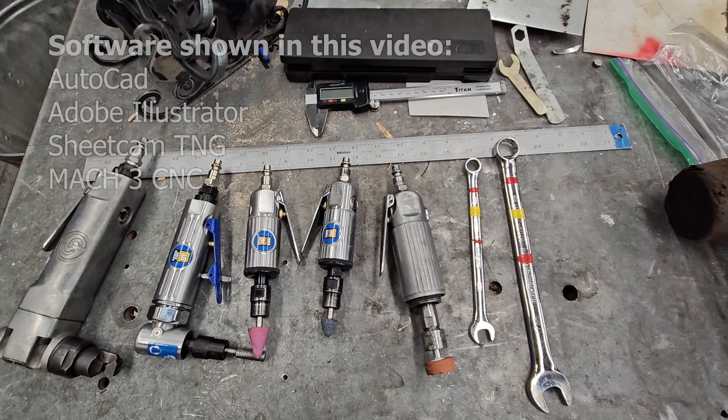So I currently have a big empty space in one of my tool boards, and I have some air tools that have just been sitting in a bin and I want hanging. So I'm going to design something for that.

In AutoCAD I started making some ideas and kind of figuring out my spacing. This is going to be able to hold those little 1/4 inch adapters until I eventually got to, I think it was that one, or was it this one? It was one of those.

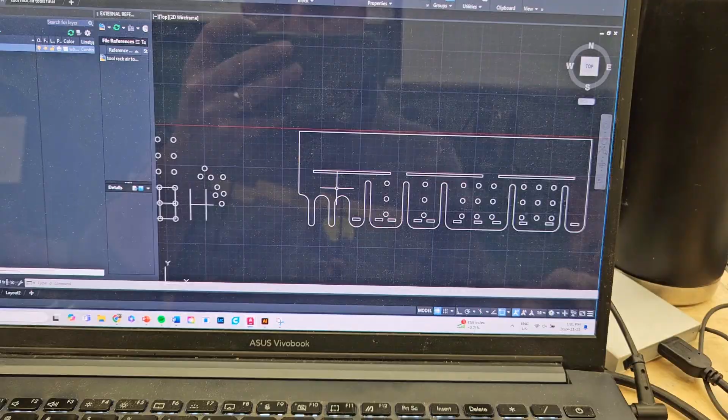I then imported that DXF file into Illustrator because I like to add text in Illustrator, just easier for me to work with. Added a little wrench symbol because that's where the wrenches are going to go. Fixed up a few things. There's a couple nodes that were floating in space. There's a couple broken lines, but now it's time to plasma cut.

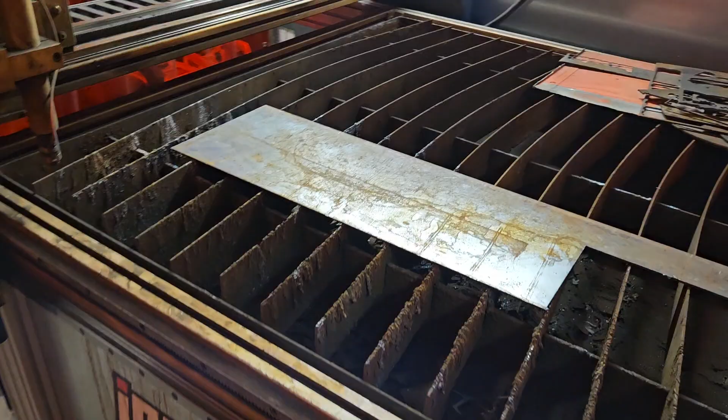Got a nice piece of metal here. So I've got my drawing here. I'm going to go operation. I'm using SheetCam TNG, by the way. I'm going to go plasma cut. I've already chosen my cut layer, and the tool that I'm going to be using is tool number T11. That's what mine's called, but it's for 10 gauge or 1/8 of an inch, 45 amp fine cut, which is what's on my machine, and 84 volts.

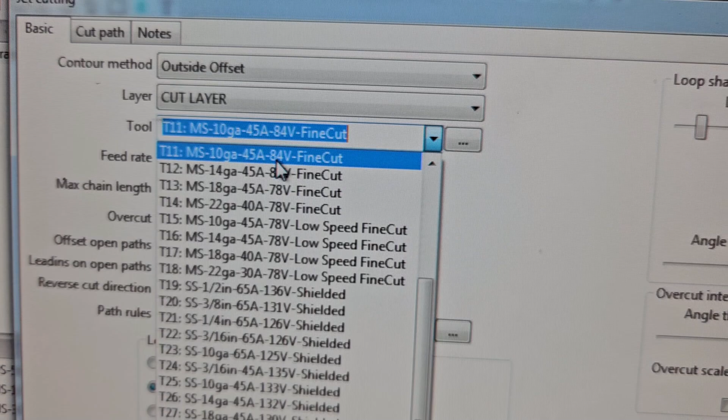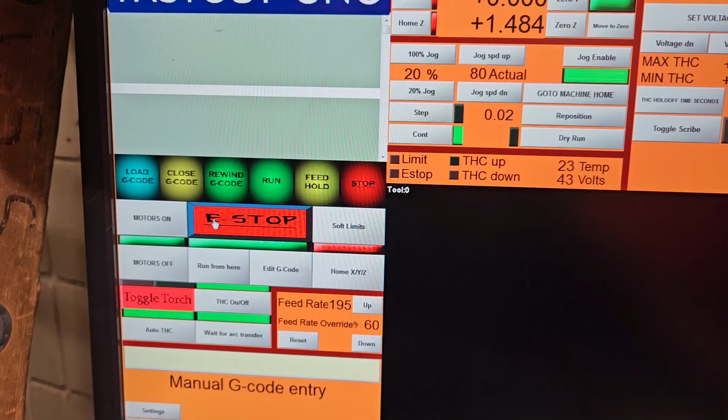Okay, cool. Now that gives me some default settings, and there's no error messages. Yay, I'm happy. So I could take that now and export it by pressing P, convert it into G code, save, does the thing. And then once I get to the FastCut CNC's Mach 3 licensed whatever, I can go File, load the code, find my recent code, and there it is.

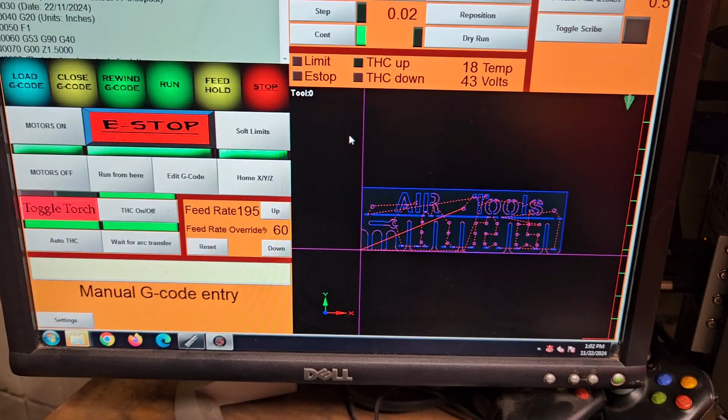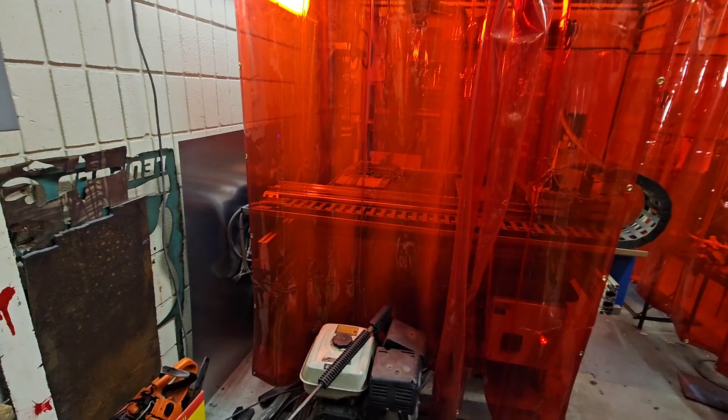Okay, let's set up our metal and the thing. I've already got my motors on, so I can go drive around. Here, let's zoom out a little bit. Hear that noise? It's doing stuff. Now, I usually just kind of crouch here. I don't have the wireless system set up for moving it around, and I'm going to eyeball it to get it close to where I want. And then I'll walk over.

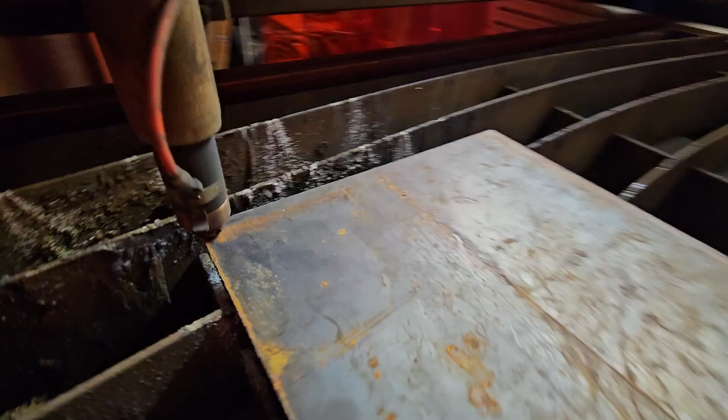Not bad for my depth perception. I'm only off by a little bit. Let's go tidy that up. I'm happy with that. That's going to work for me. Then I can go back over here. It's easier to do with a partner who's giving you directions. I'm going to zero out by pressing zero all, and now the machine believes it's in the right place.

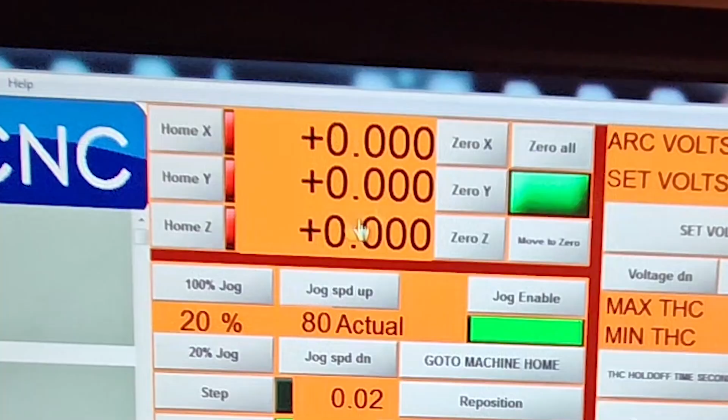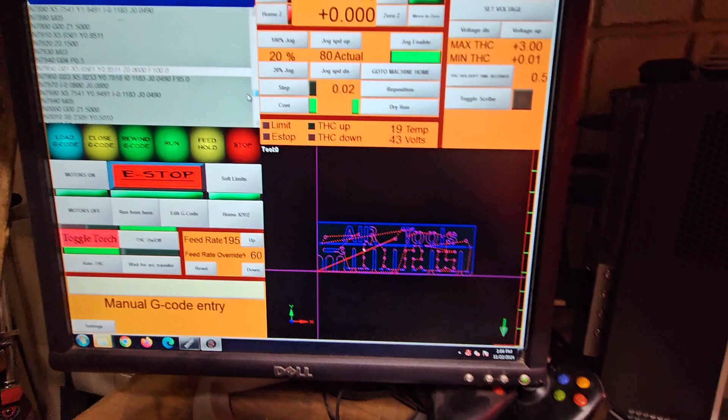Now I could do a dry run. I am going to do a dry run, but only of the final outer shape. So I'm going to scroll down through the code, until eventually I see white lines on the outside shape. So let's see, probably about, ooh, that's a big white line that's going there. We're going to press run from here. There we go. Press run.

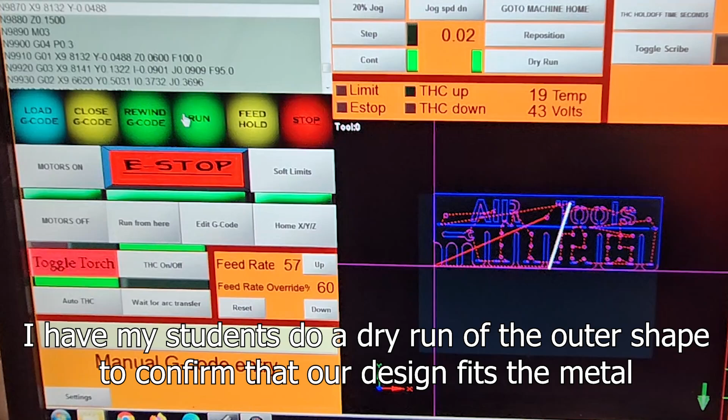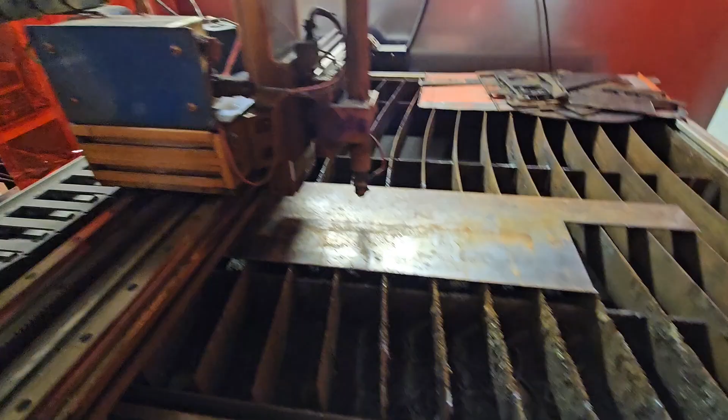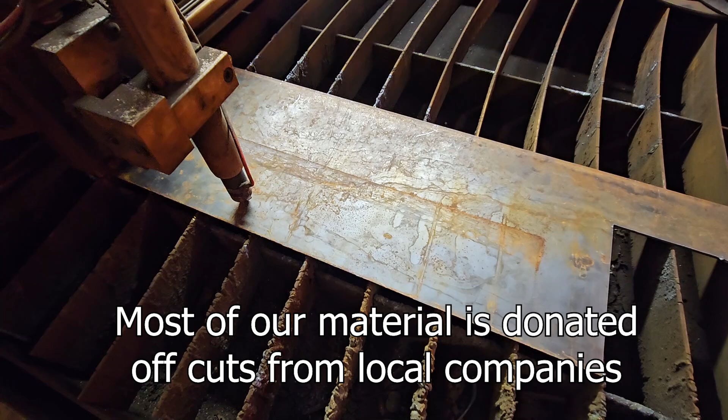Just agree with everything it tells you. And then it's going to hopefully run through that outer shape. Sometimes you have to press run again. Come here, run. And you can watch it go through that outer shape to make sure it actually stays on your material. It's kind of slow. I could speed it up. Okay, good. Didn't go off the edge. Nice big straight cut there. It's pretty close, but I think we're okay.

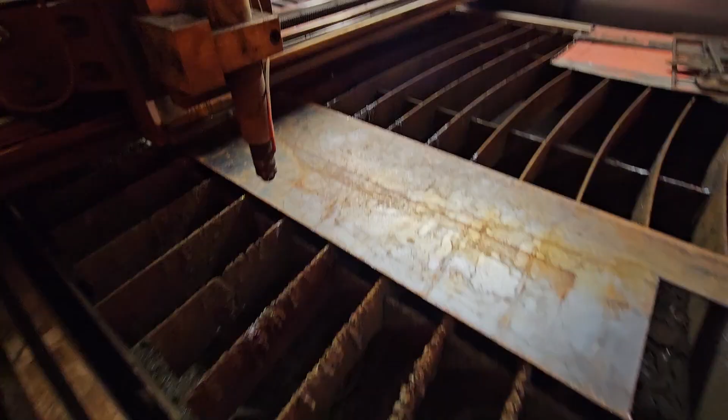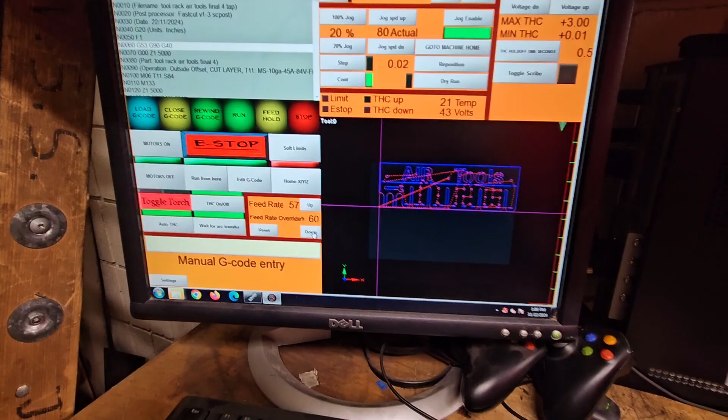Let's go run this thing. It's going to be about a 5-minute cut, I believe. Turn on the ventilation. Close the curtains, you know. Turn off dry run. And I found to make this cut nice, it does say 84 volts, I'm going to crank it to 95. Enter. I'm going to slow my speed down to 60, even though it's going to take longer. I'm going to get a nicer cut. I've got an old tip and it tends to work.

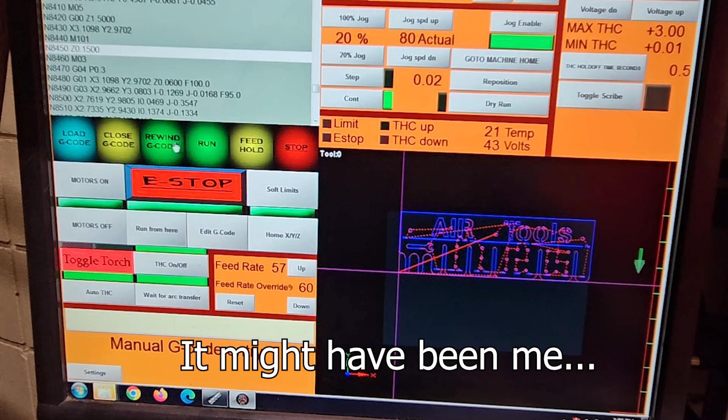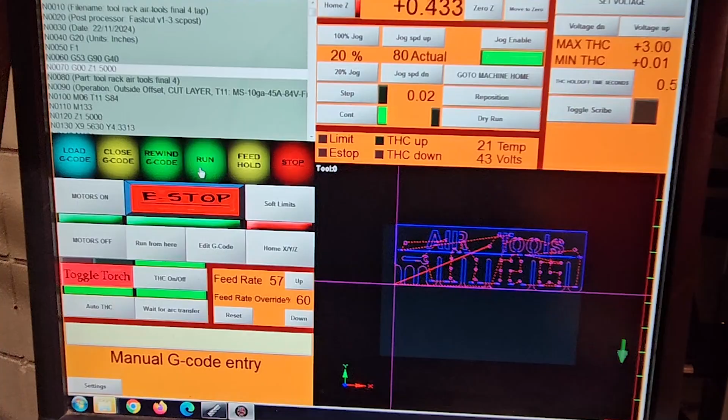So let's rewind the code, hit run, press OK. Oh, hold on. Why are you doing this? Rewind all the way. Stop. What am I doing? Rewind. Let's move to 0. Man, it's a day. Move to 0. Let's go back to where it starts. Now we can run through. Now if I have to run back and press pause for any reason, it'll be because one of those random pieces falls out and goes sideways.

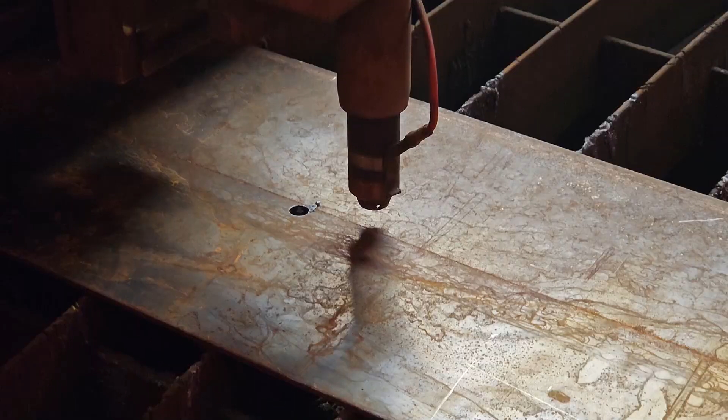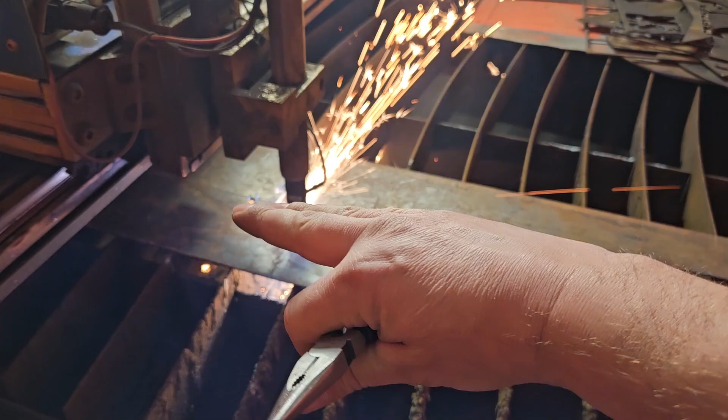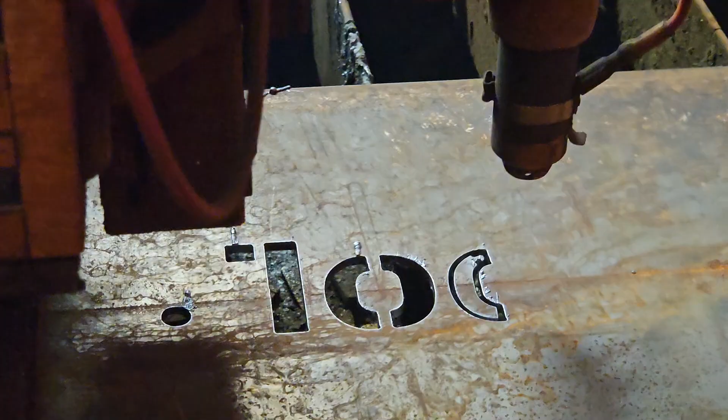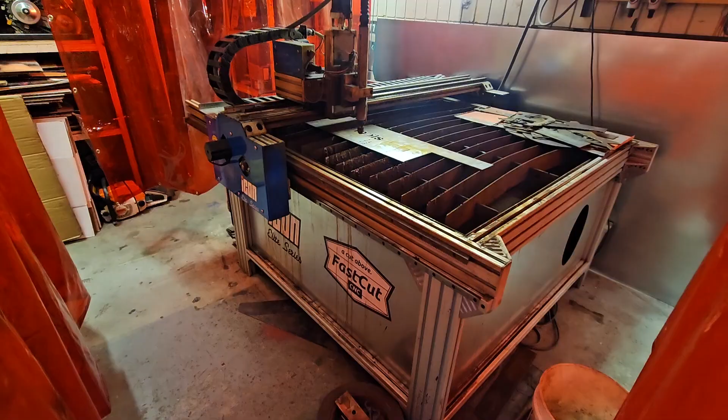So if a piece falls down, that's perfect. If it just stays there, that's all right. But if a piece while it's cutting starts here and then goes crooked after the cut, I gotta go press pause very quickly, or it might hit that cutter tip and make all my metal move. So that's fine. That shape there, it hasn't fallen out, it's just floating. Fell out, that's fine.

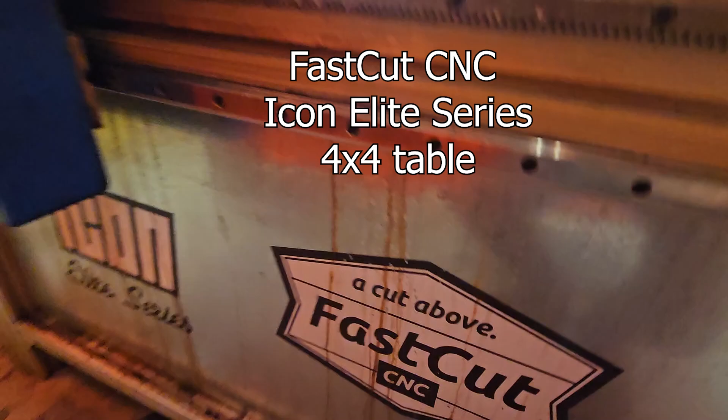So while that's cutting, let's talk about the machine and the setup I've got. I have a Powermax 65 by Hypertherm. The table that I'm using is made by FastCut CNC. This is the Icon series, and this is a 4x4 table, so 4 feet by 4 feet.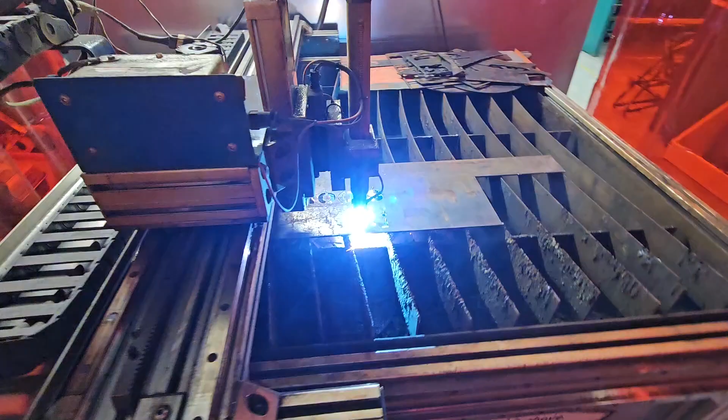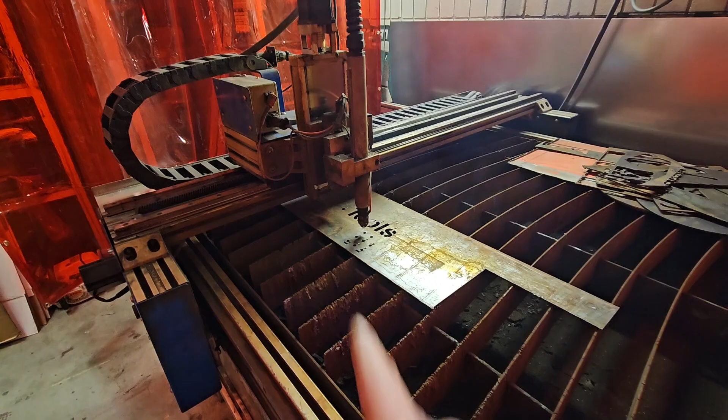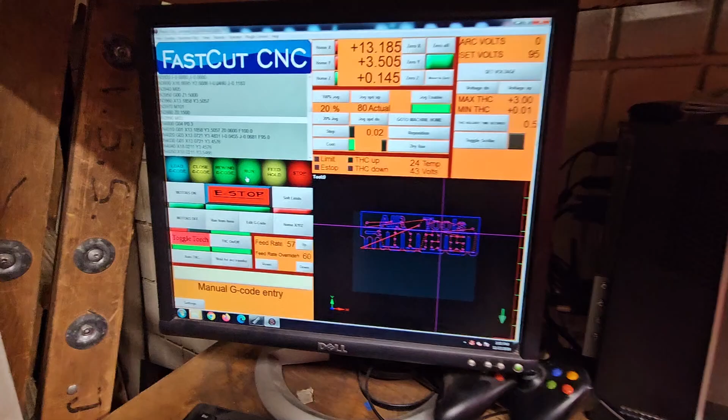I've been using genuine Hypertherm tips in here. That has been giving me very nice quality. And I've been using that same tip for about a year and a half. I've done over 500 cuts in the last year with students and for myself. We've got an older Windows 7 system because that's what's compatible with this software. But it hasn't let us down, other than a cable coming unplugged or little things like that.

All right, there's a nice big shape. So far everything is still staying flat. That's fantastic. Pretty fine cut. I did the design also to include fat lines that weren't going to be too small for the machine. When I'm programming, I try to make sure my smallest cuts are never any smaller than 0.14 inches in width or diameter. I find that is a good number to stick around. If you need something that can do finer, you might want to look into a water jet.

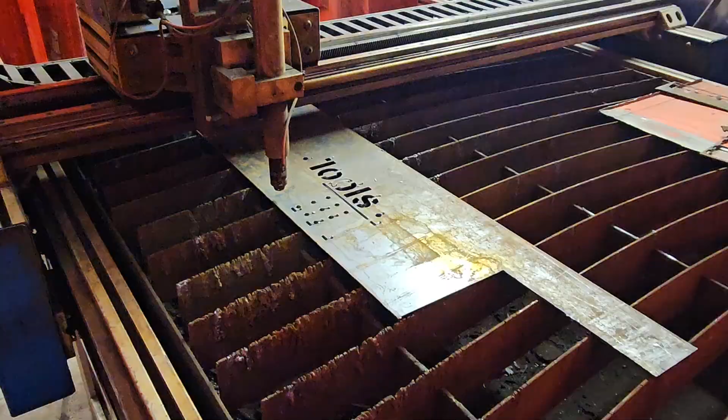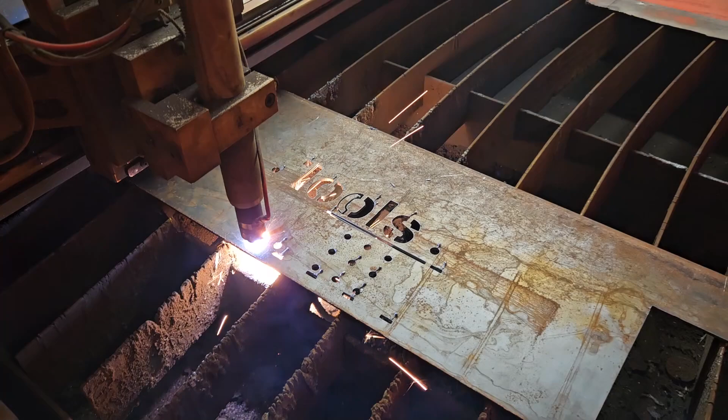So all these little rectangles, yeah, it'll keep the weight down, and it's a lot of extra cutting, but it's going to allow us to bend the metal easier when there's a really long bend. In this case, from here to there and from here to here, it's going to be about 19 inches. There's going to be a 90-degree bend here, and here about a 10-degree bend.

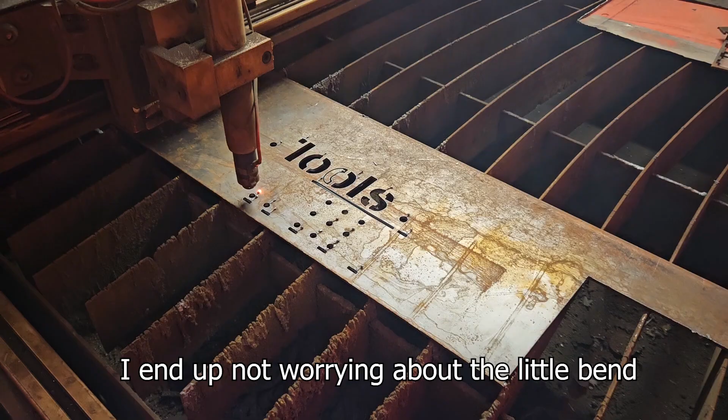So you know what one of the coolest things about this is? I get to teach this to teenagers. Teenagers get to learn how to use industrial equipment like this. Pretty neat. Okay, cut is almost done. I think it's time for the outside cut.

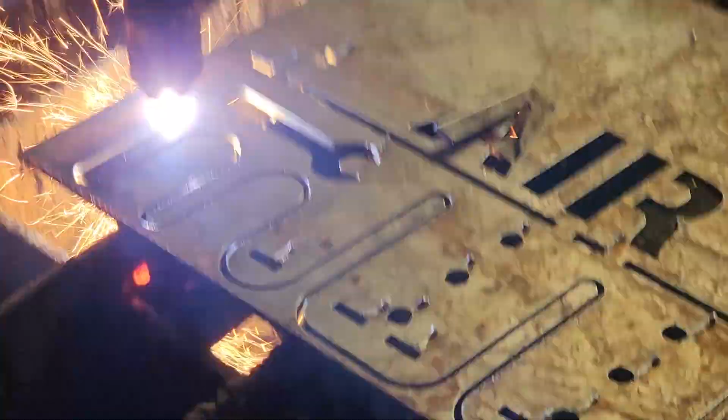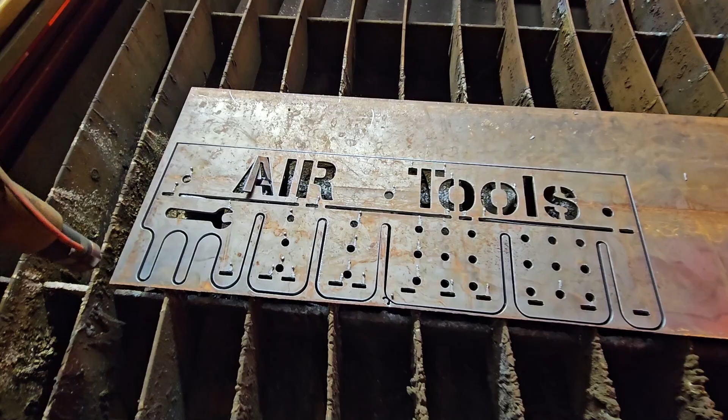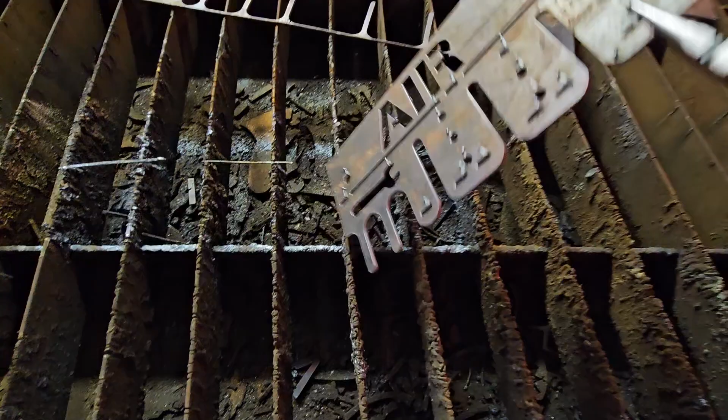Sweet. So that took 4 different versions to get a file that would work right. So that was a little sideways thing. Luckily, nothing hit it. Now, with those settings, I cranked it to I think 95 volts and I slowed my speed down to 60% of what it recommended. There's gonna be a little bit of cleanup, but that's not gonna be too bad. We'll hit that with a grinder.

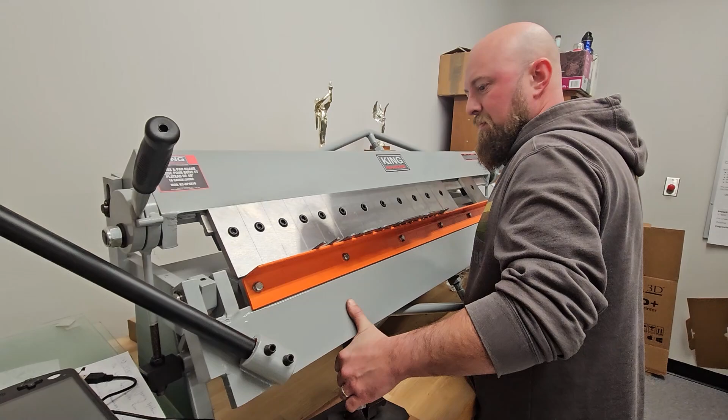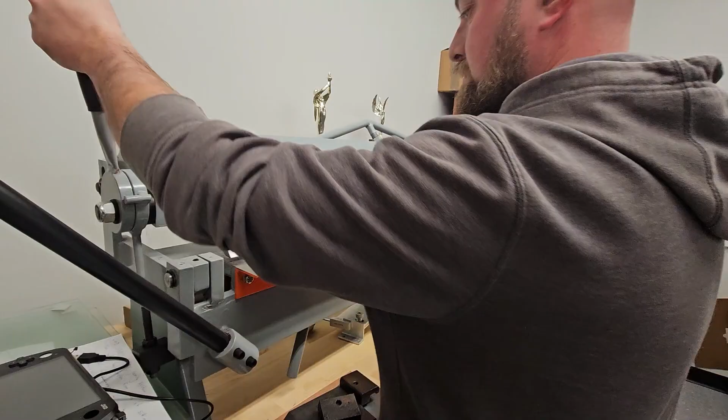Okay, let's see. Almost 90 degrees. That's pretty good. A little more. All right, the air tool holder rack thing is mounted. Let's put some tools on it.

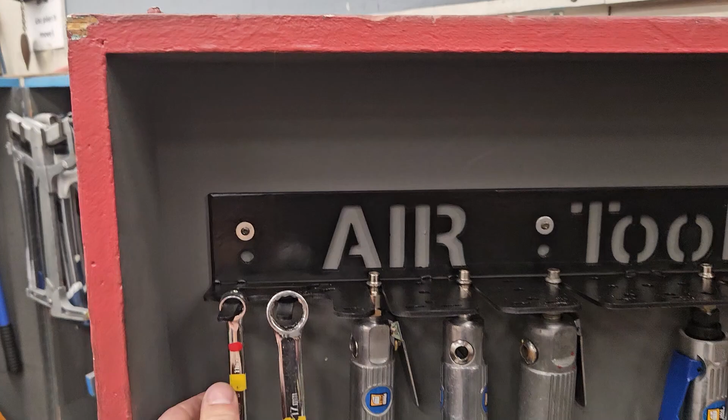And there we go, it's got some tools on it. That's not, well, maybe not that one. Those look a lot nicer. I've left these all for 1/4 inch shanks because that is what I've got all my basic air tools set for. Yeah, that was a fun little project. Let's just look at it from every angle. You ready for that B-roll?

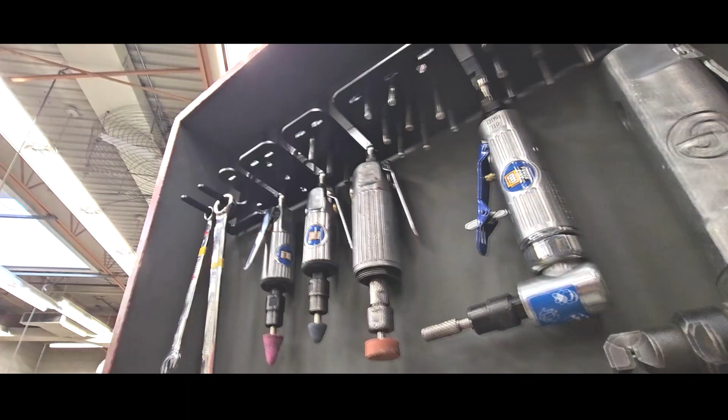Okay, that was pretty boring B-roll. There you go. There's a nice shop project if you have access to CNC. I mean, you could cut all this out yourself, but I love my plasma cutter.